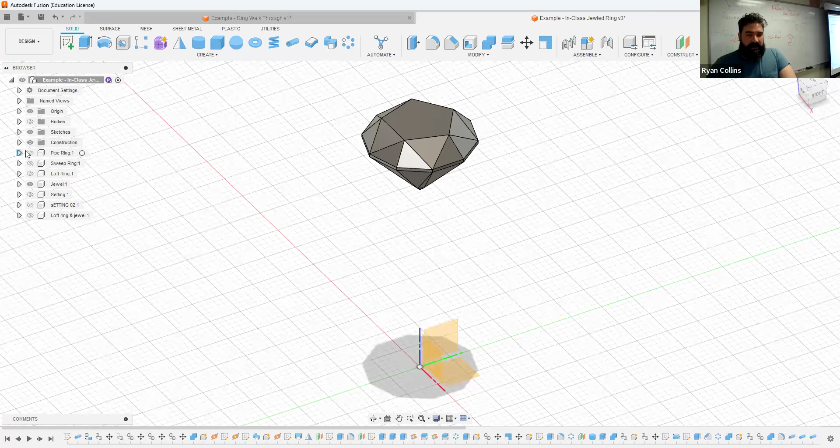All right, so I have just a basic jewel here, and we're going to be building that into some sort of a ring. So what I've done, like for the pipe ring, like I said, you can make just a simple pipe. But this one is one simple pipe and copies rotated ever so slightly or moved out and then joined together to make a more complex kind of laced ring. It's just using the simple pipe tool, making multiples.

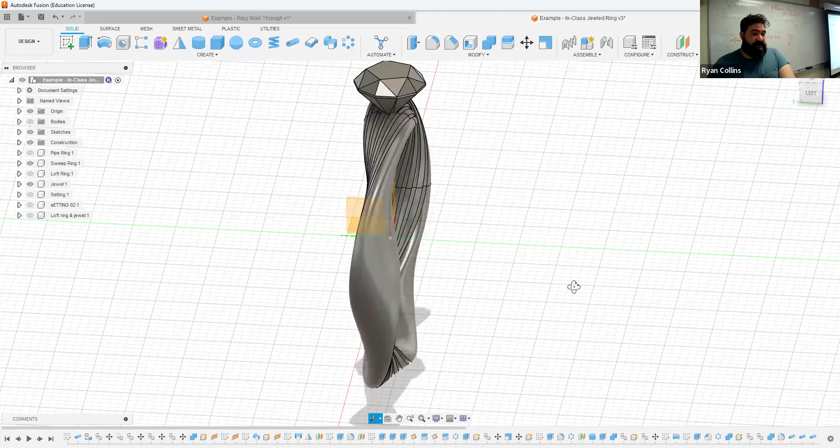You could do a sweep, which we didn't go over before, where you can actually rotate that profile along that path. So this is the result of the same thing of making an oval, and I made a notch in one, only in this one I made multiple notches, and then rotated it around that simple path. So a really cool option; that would probably be a pretty painful ring, but a really neat bracelet.

Or the other option of a loft, two profiles, in this case a small oval translating up to a rectangle, and then a setting built up straight above and that sort. And ultimately that's what I ended up working with when I made the complete one, along with additional features on the sides. So those are just a couple ways you can go about this.

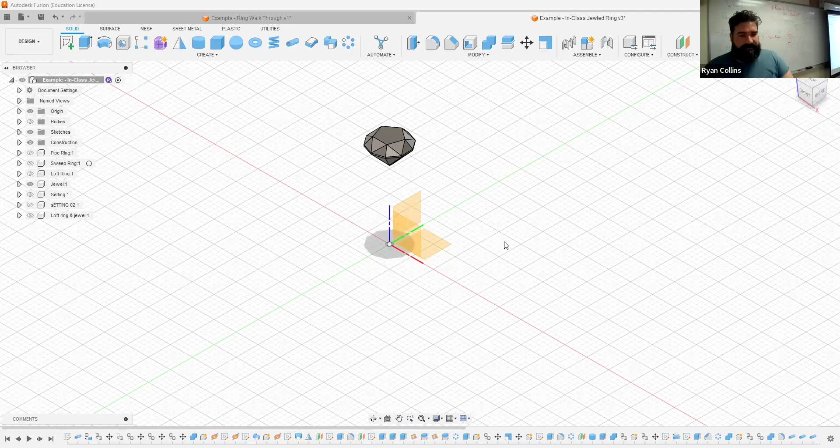But I want to focus on making a jewel. So let's open up a new project, and first thing, save: example, jeweled new ring, neato. Okay, so obviously we can set up the different components and all that later, but first let's figure out how do I make something that looks that complex. It's really not, but let's show you.

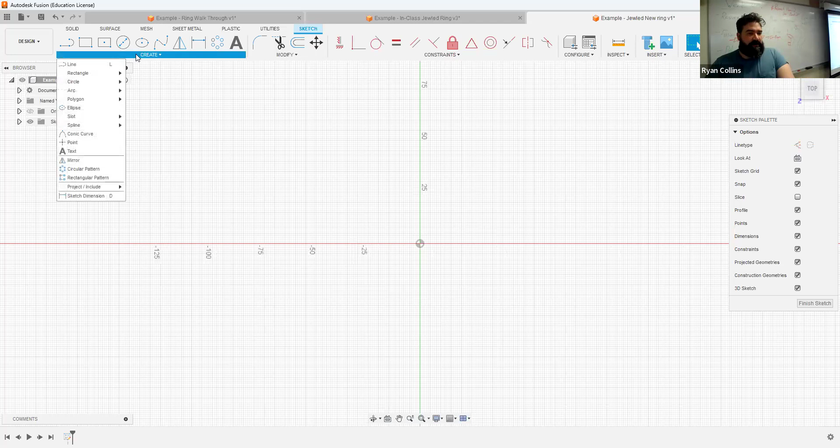So I'm going to start with a sketch, in this case XY plane, just so I can look straight down. And instead of a circle or anything like that, we're going to use the Polygon tool. So you have three options here: circumscribed, inscribed polygon, and edge polygon. We're going to focus on circumscribed and inscribed.

Basically, all that means is the polygon is based on a circle, and whether or not you want the tangent lines to be on the outside of the circle or the polygon lines to be squished inside. For this case, it really doesn't matter. You could always resize later. So let's just say inscribed this time. I'm going to leave this as a center point.

Now, do not hit enter first. You have a couple of options here. As my mouse goes around, I can rotate it. Might as well leave it right on that path there. You can, of course, say what diameter you want the circle. Again, that's diameter, or sorry, that's radius. I apologize. There you go.

A little hard to keep it on center here, but to change how many sides, press tab, and now you have the option here. The important thing is how many sides to choose in this case. Let me just hit escape here so I can show you.

What we're going to work with here is, don't let this fool you. You have 1, 2, 3, 4, 5, 6, 7, 8, 9, 10. So 10 sides here.

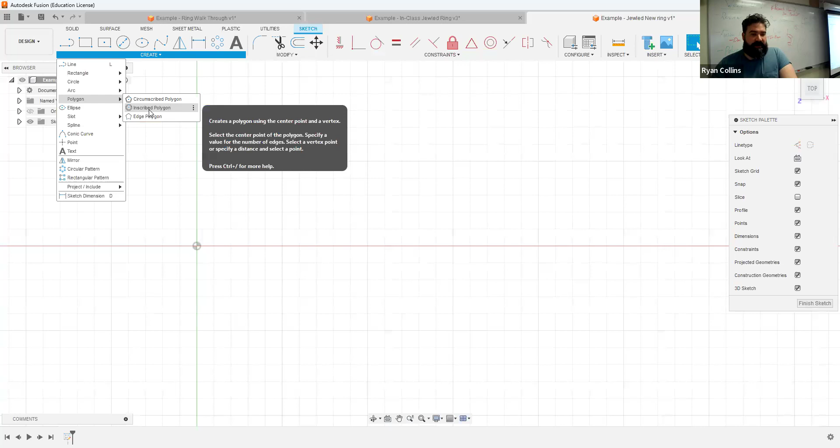So let's repeat that. Polygon, inscribed, center. Sure, we'll make it 10 sides, tab over. Let's make it an 8mm ring, just keeping things different. Okay, so that makes my polygon. It's all I need. We're done with the sketch. That's it. This is done largely with a multitude of extrusions.

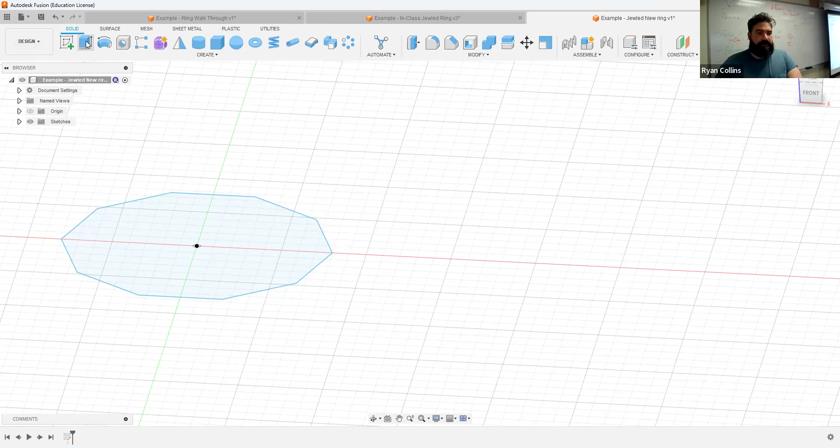So hit extrude, and in this case, I'm just going to go up like 1mm. It's fine. Or you could even do half, just a little bit less. The reason I'm doing that I'll explain in a minute, but ultimately it's for the sake of how we're splitting and making more facets. You need to have a little bit of space there. Otherwise, you could go straight into stuff. But in this case, we need that.

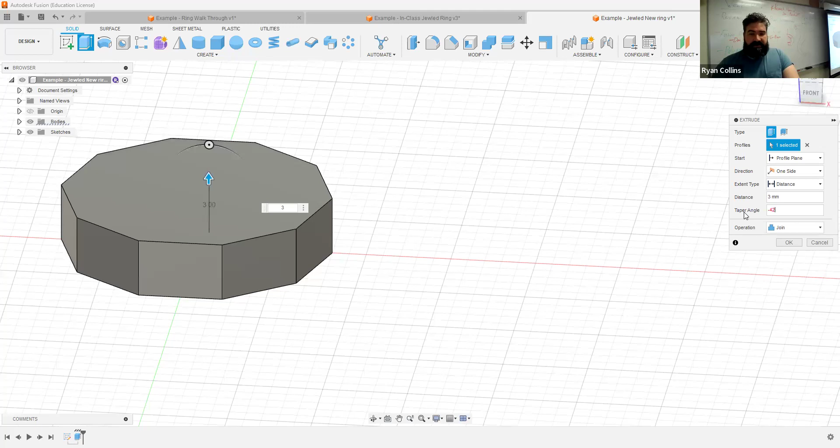All right. So now we're going to perform 2 more extrusions. One going up, one going down. In this case, I can just select the top surface, and let's go up like 3. But what we're going to do is put a taper on this. As I said before, one of the most common cutting angles for jewels is 42. So negative goes inward. So press negative, 42. Instant facets.

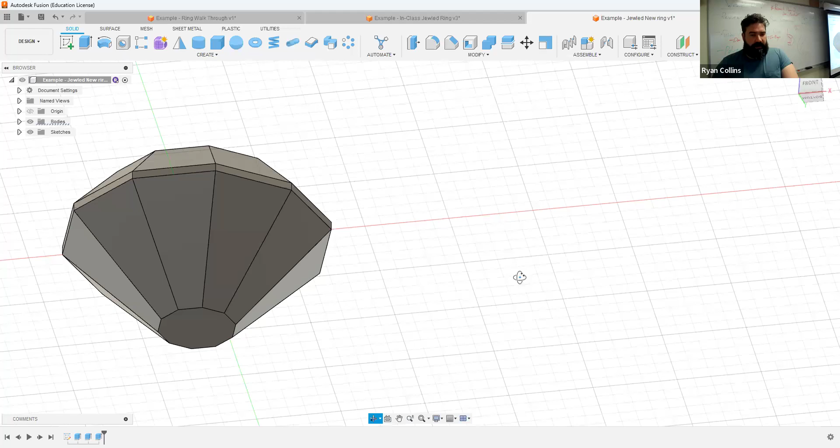Okay. Orbit under, repeat extrude, same. We'll go down slightly more, let's say 6. Taper angle, negative 42. Doesn't have to be 42. This is, like I said, just a common thing. Okay, there we are. Simple jewel. But I want to make this more complex. Note the number of facets there makes it all extra shiny. In order to do this, we need a bit more. And also, no, I did not bring it down to a taper. You cannot bring it to a final taper for this to work.

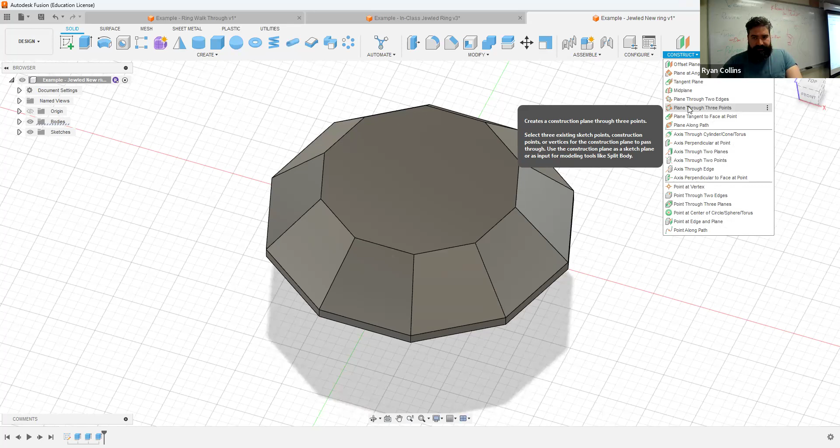So what we're going to do is just pick a couple sides to make additional facets, and then we're going to rotate those facets around using the circle pattern tool. So first thing, we're going to use the construction plane tool, and we're going to add a plane through 3 points. What you'll do is select some opposing points. So 1, 2, and 3 in the middle, and see how it makes this triangle shape. That's what we want. I can go ahead and do the bottom too, but first we're going to go through this.

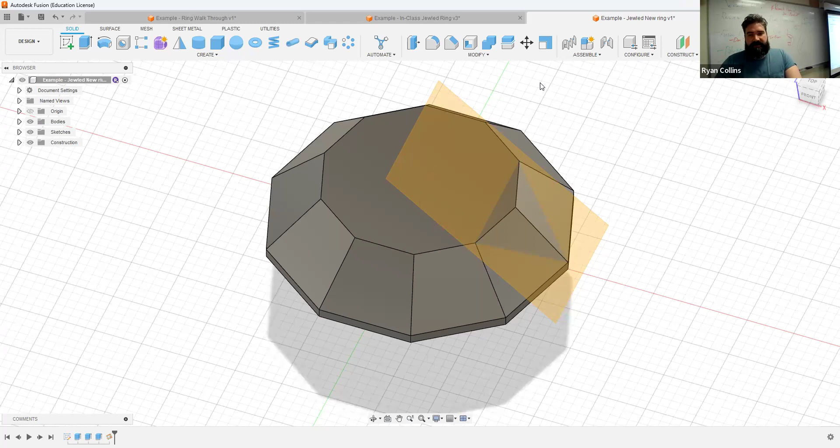Then we're going to use split body, which, as the name sounds, splits a body based on something. In this case, the construction plane. Go to split body, the body we want to split, the main jewel, splitting tool, that construction plane. It's going to make this red circle around, showing you the extent of how far it could cut. Hit OK. When I expand bodies, I have the whole thing and that little chunk it just chopped off. Now I've got that added facet. I can hide that construction plane for the moment.

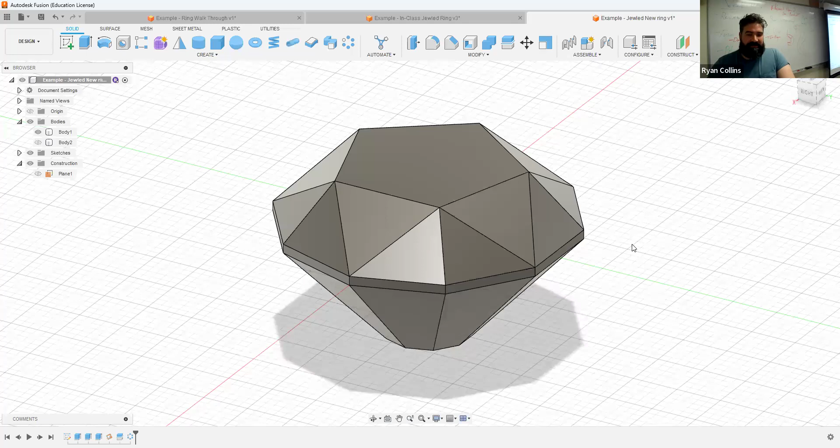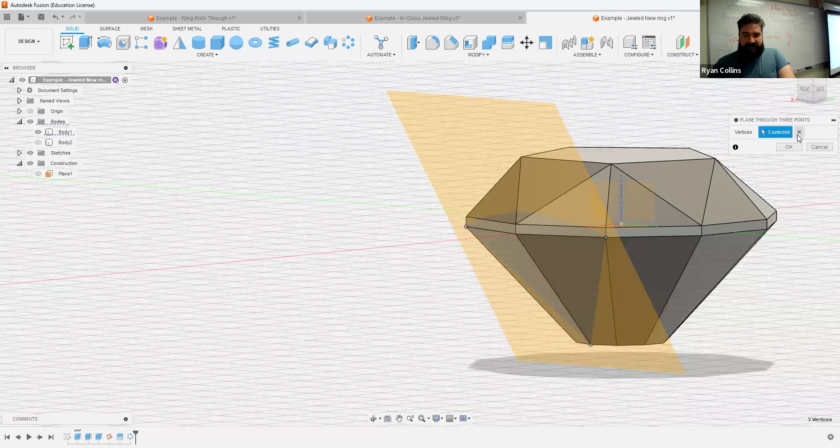Repeat the process for the bottom. Construction plane through 3 points. In this case, we'll go 1, 2, in between, 3. Now see, what's going to happen here is it's going to chop way too much in. So let's reverse that. Make the peak toward the center, the middle here of the extrusion. So select that point. The order doesn't matter. So select my 2 sides toward the bottom. I just want to chop out those sections. There we go. Finish construction plane.

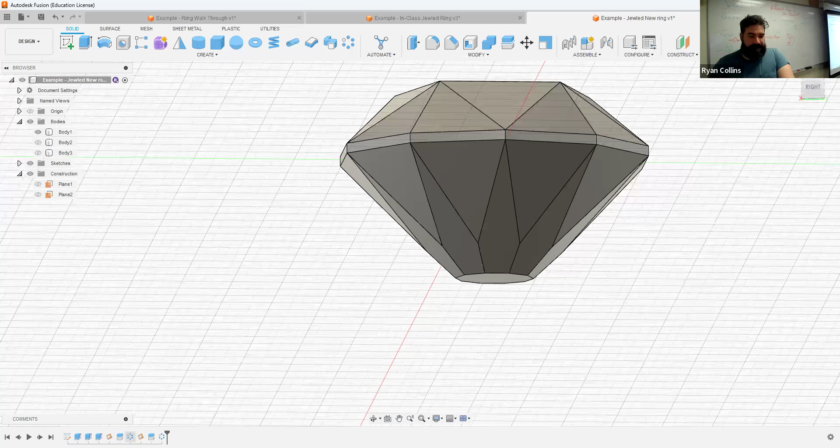Split body, the main body, select cutting tool, construction plane, hit OK. Hide the little chunk, hide the construction plane, circle pattern, object type faces, select axis, the Z axis, or my origin. It's going to select 5 again. That's good. This time, let's try 10. That's probably going to cause problems. Let's hit OK and see what happens. Ooh, makes it a lot neater. That's actually pretty cool. Maybe I should have done the repeat in 10 before. Let me step back and do that. Edit feature, instead of 5, let's make that also 10.

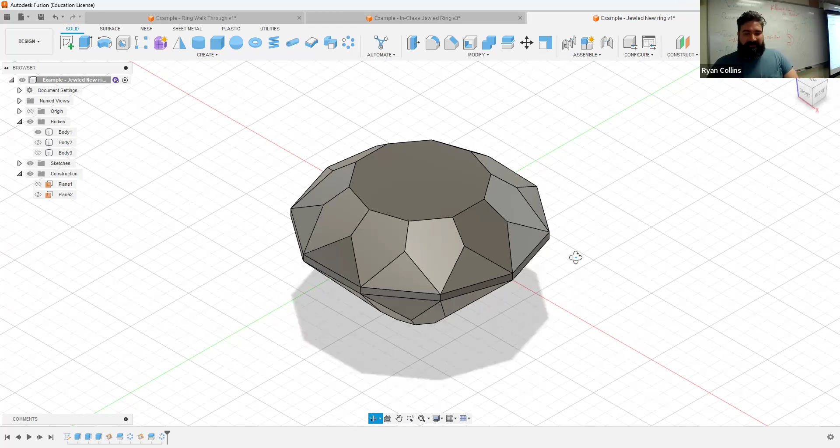Nice, nice. So there you go. Really simple way of making a multifaceted jewel. Is it absolutely accurate? Nah. Does it look neat? Yeah. If you do want it to go to a point, now you could extrude it downward to a point. The problem is we needed that flat bottom to have enough vertices to select from.

So now if you want, final thing for the jewel, go to extrude and make sure taper angle -42, so it just continues, and you can just draw it down until it makes a point. Leave it at join. Yep. And there we are. So really simple way to make a jeweled object. You do not need to make it come down to a point for this project. That is just if you so chose to make that come down to a point. It's just important that you do that after the fact.

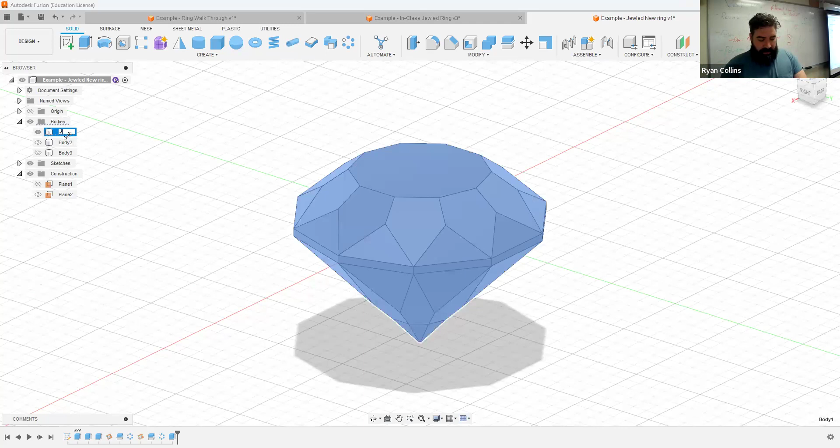Okay. So that's how to make our jewel. Super duper. I need a ring around that. Somewhere around there. This is the part that is going to be kind of up to you, however you want to go about this. So I'm going to leave this body here and title that as jewel, because I'm going to use that as multiple other options. All right. So let's make our whatever. In this case, let's make a bracelet. Same diff, it's just larger.

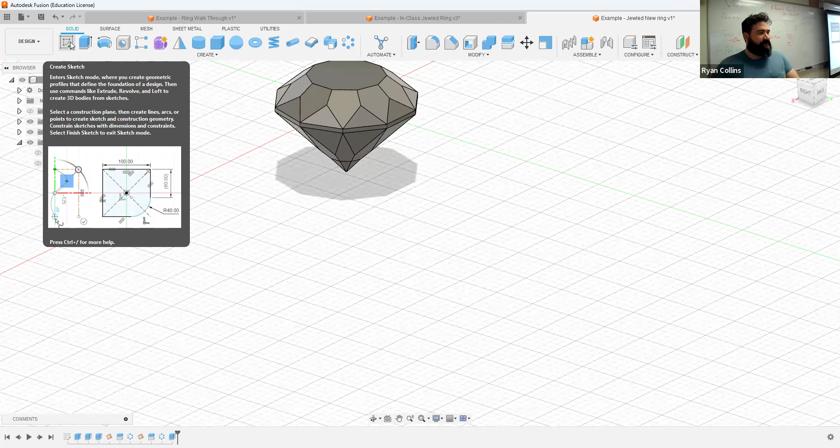All right. So right now I'm going to leave this sketch on its own outside, kind of like we just did with the lidded container project, because I want to be able to use this sketch on any object. So same deal. Make a circle. I want to make a 2-point circle. I'm going to just start my point somewhere close to, doesn't have to be touching by any means. It could be floating well above. We can move that jewel object up and down as we please. Probably do just that. All right.

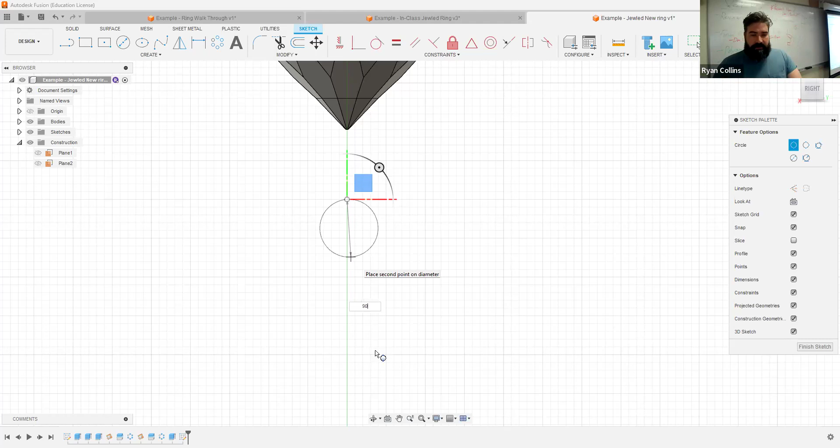So if I want to make this a bracelet, like I kind of said before, that'll be a significant bracelet to fit around my hand. So yeah, let's make it kind of loose. Let's make it 90, right? 90 millimeters. Wow, they got big. And let's snap in place. It's always a little tricky getting it to snap. There we go.

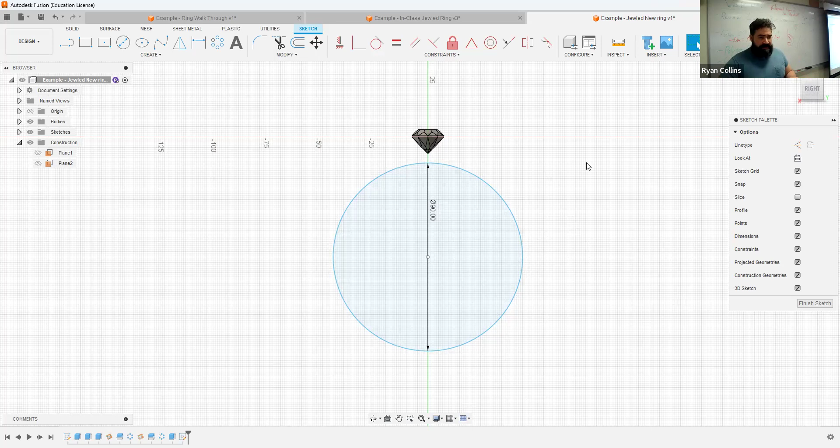Okay. So if you are going to use the pipe tool, a single circle is fine. If you're going to use the sweep or loft tool, I recommend making 2 separate sketches. One sketch is my circle profile, and I'm going to label it as such. No, I didn't want to do that. I meant to just slow click circle, and then make an additional sketch for your 1 or 2 profiles, depending on if it's sweep or loft. The reason for that is your sweep or loft profiles are perpendicular to the circle. So start a new sketch on the perpendicular plane, the XZ plane in this case.

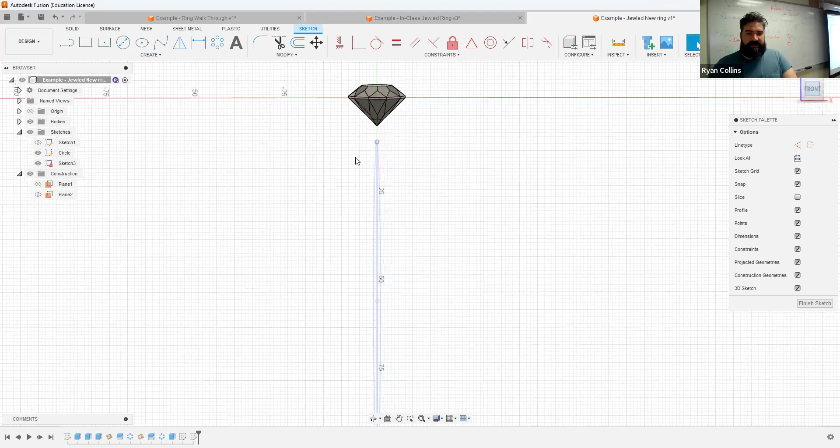There we are. If you need a more easily interactable way to work with the previous sketch, use project, sketch, hit OK. Now, the reason I did that, you can see how much more clearly the absolute top and absolute bottom of that circle are from a perpendicular profile. Again, things that make your work easier. There we are. All right.

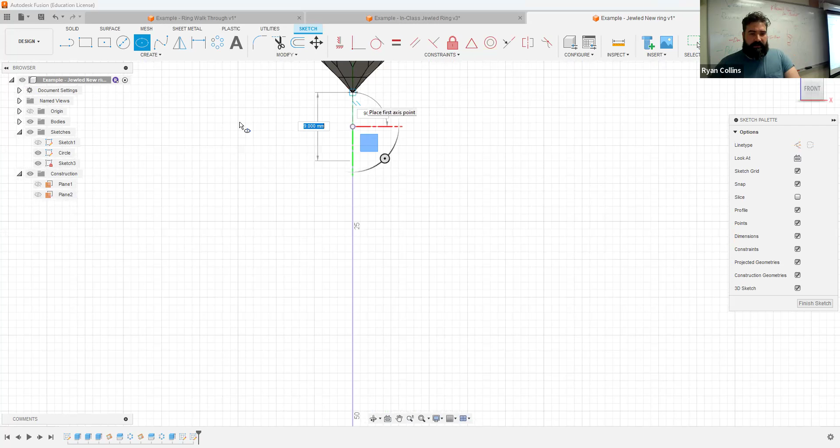So I can make, let's say, an oval. I can actually make it snap directly to. Let's make this a little bit larger, and why not? Now, the problem is that it does make a center point circle for this, so maybe this wasn't the best option, but whatever. We'll work with it from there. Hit OK. I'm going to hide the jewel real quick. That way that's out of the way and not interacting.

If I am making a sweep, 1 profile is fine. If I'm making a loft, you need 2 profiles. In this case, I'll do both just to have them built on already. You can do really whatever you need. So 10, sure, and we'll make that, I don't know, 50. Okay. You can, of course, adjust your profiles. If I want to make these rounded instead of rectangular, go ahead and add a fillet.

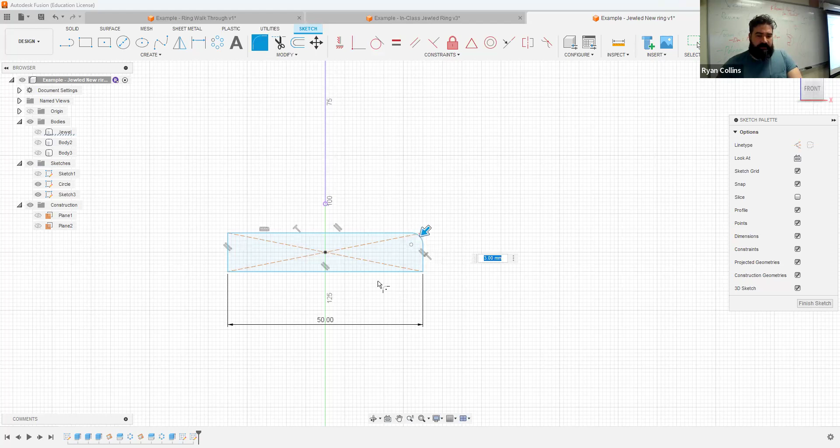If I'm going to make all these the same, adjust one to the size you want to fillet. Do not hit enter or anything, and continue selecting around the edges. And it will link all of them to the same, and now I can adjust all of them the same way. Oops, it did not click all of them, did it? Something happened. I think I hit the wrong thing. All right, fine. I think I hit the wrong button there for a second. Repeat fillet.

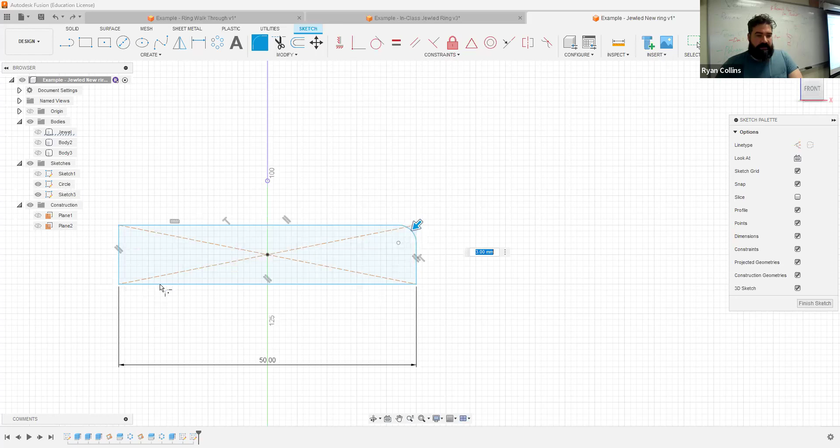Sorry about that. There we go. All right, 3, 5, whatever. 6 too much, so I guess 3 was good. For some reason it keeps knocking out of that one. Weird. And of course it doesn't come up with the same one. Whatever, there we go, okay great.

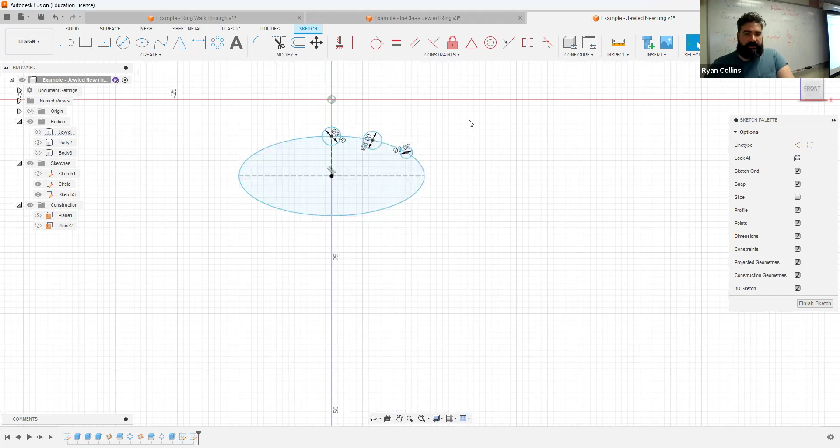And there we are. For this case, let's go ahead and throw a couple of notches into the sketch just for reference. Center point circle, we'll say 3, and then I'll make a couple more over here, 2, sure, 3, super duper. If you want to make these all match, obviously you make a mirror.

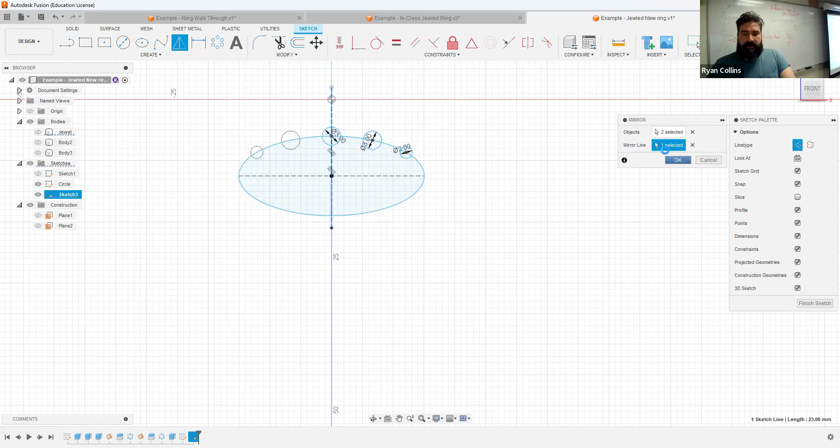So let's make a line straight through as a reference line. Make sure that line is a construction line. Press X, so it's a dotted line. Mirror those circles across my mirror line, and it repeats over there. Just so we have that. All right, finish sketch.

Again, if I want to make a sweep, I can select my profile, select my path. There we are, I've made a tire. Congratulations. But how you can work with this, you can play with a parallel and such.

That's not really going to work very well for this case. Keep your profile perpendicular in this case. You can twist and taper this, and it works in degrees. So if I type 180, it doesn't make a complete circle. It needs to come back to the same, so it needs to be in increments of 360. So the next close one would be 720.

So if you want to make it super duper twisty, there you go. I've already forgotten what the next one would be... 1080? Yeah. See if it's too much. Nope. So you can keep going until it just completely errors out, or whatever. So there you go, you can make that a sweep and make a super tire twisty time.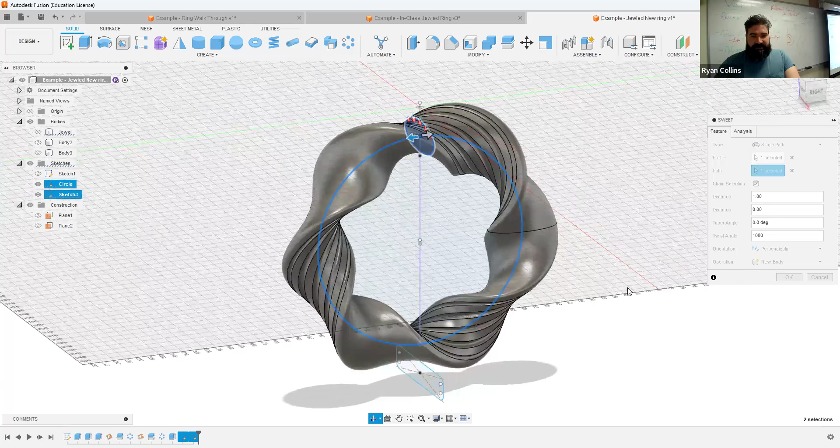All right, what object is that? Sweep twist, neat, so that's how you can make that. Now, how are you going to put a jewel on that? I don't know, you figure it out. But that's how you do that.

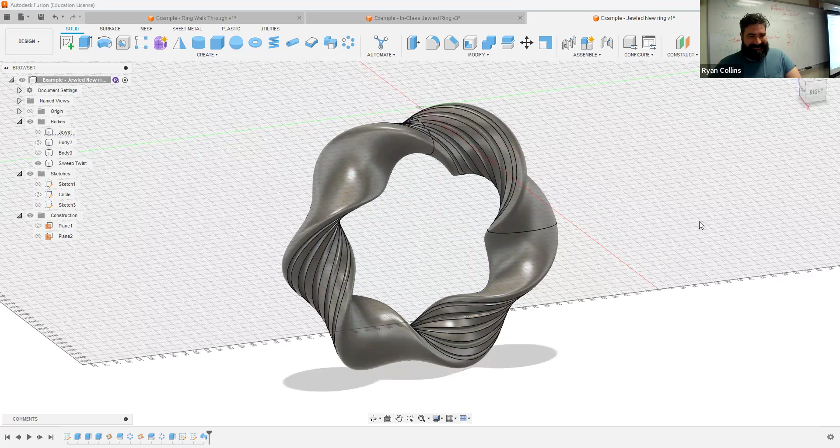So let's save right there because I haven't saved in a little bit. Sweep, all right. Unhide the sketches, and let's do that again, this time with the Loft tool. Come down, remember that Loft transitions between the two. So select one profile, select the second profile.

It's going to error because I didn't select the path yet. I need my rail, which will be that, center line. Yes, rail, there we go. Now it's only going to make half because it's going from one and stopping at the other. Like I said, you just mirror them. There you go, this is functioning properly now.

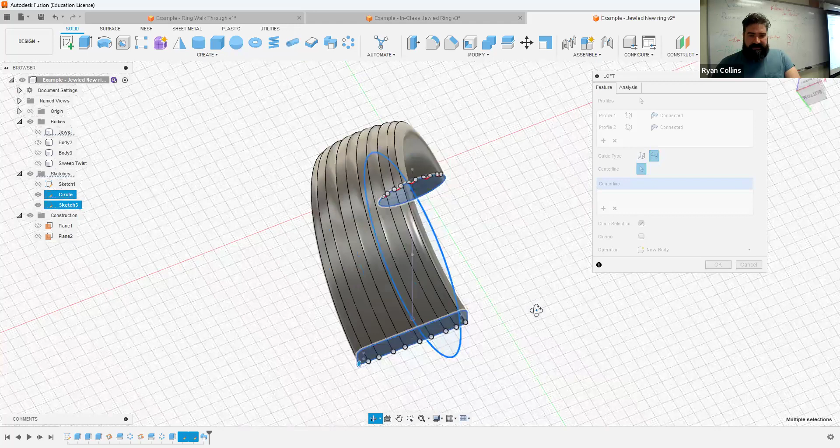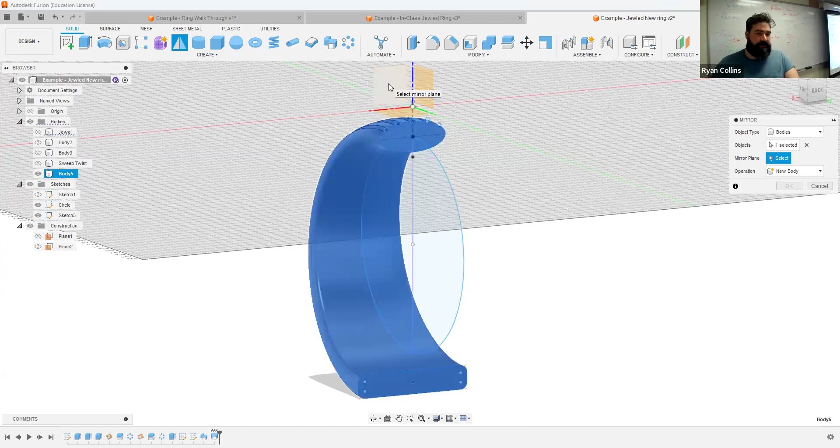Again, I'm not sure why the other one didn't, I must have done something wrong. But anyway, there you are, that's how you can make those work out. If when you make the other side, the object, mirror the object, which is one side, my mirror plane can simply be the origin plane, and you can let them join. There we go, now I've made a stranger tire.

So that's how you can make a loft and a sweep ring. But as I said before, if you're making a pipe ring, it needs to be more complex than a single. So let me just title that as loft. And let's go back and make just the one. If I'm making a pipe ring to bracelet or ring, you could do that, but it cannot just be simply one pipe.

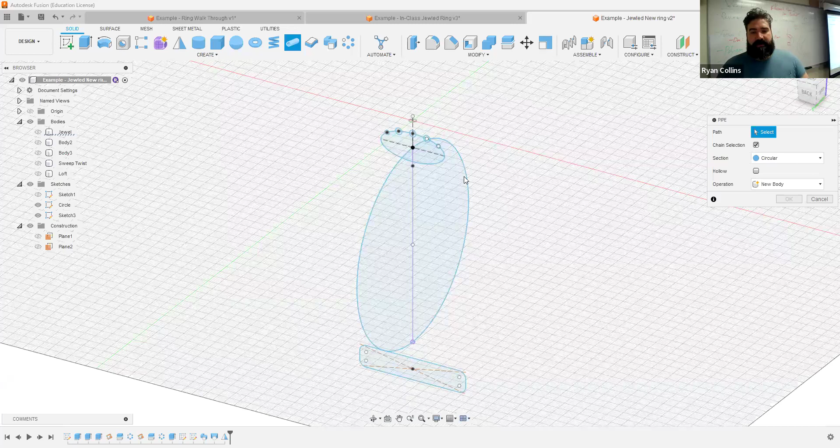So select it there, and let's just say, sure, we'll make that a 5mm pipe. Super duper, hit OK, my loft here. Now I'm going to go ahead and start my new components here to start separating these things out because this is going to get more complex. Pipe ring, I'm going to label that as pipe 1, and then I'm going to click and drag and drop that into the pipe component.

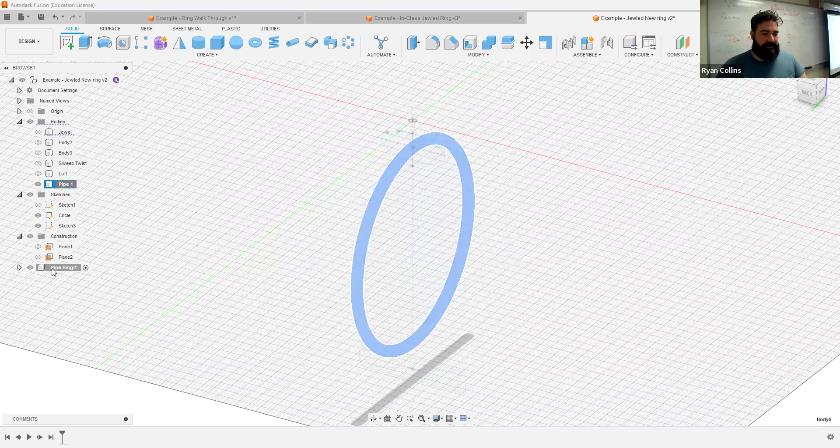I'm going to switch now to auto color, so Shift+N, just so we can clear some stuff up. I'm going to go ahead and hide these other sketches, I don't need them right now. We're just working with that pipe, we're just that one ring.

Okay, so what I'm going to do is I'm just going to rotate this a little bit. Select there, the pipe ring component is active. Let me collapse some stuff so we can kind of make sense of this stuff. And let's copy and paste.

Oops, there we go. Copy and paste. Just Control C. Come on, buddy, why aren't you doing this? Making me look like a schmuck, doesn't take a lot. What is going on here? Pipe ring, sometimes save, let's just see what's going on here. I probably have a whole stack of copies and pastes. Nope, that's weird.

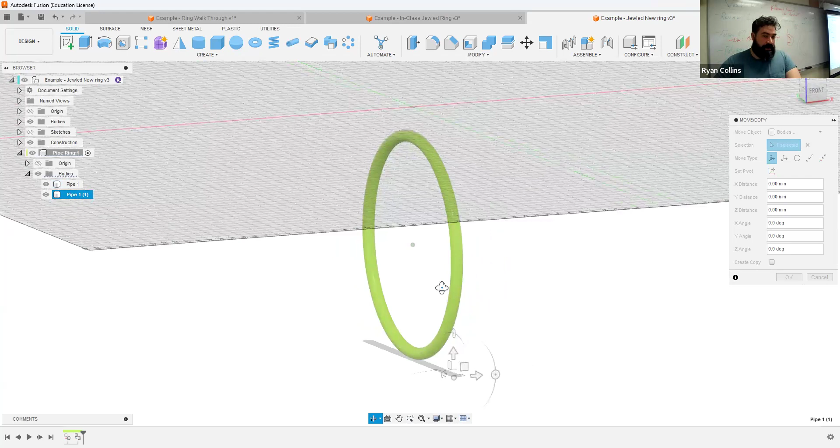Why are you- there we go, I have no idea why I wasn't doing that. Sometimes because of how the copy and paste function works, it will not put my move point in the center, but you can see it when I orbit around. If you need that, go to Set Pivot, and when you move your mouse toward the center of this ring, it should snap in place. Deselect Set Pivot - I know it's very frustrating that it does that. Now I can rotate this a little bit.

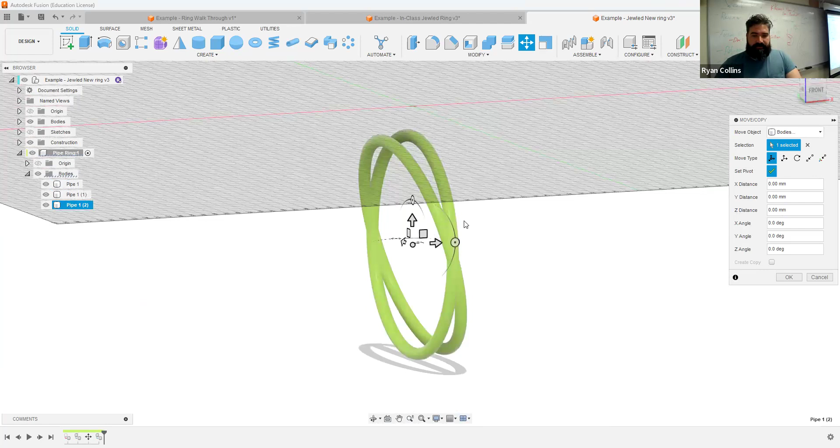I'm just going to go to the side here. Orbit, all right, 15 degrees, just so I know how far. Hit OK. Select the original, copy, paste. Hey, now it's working, do it again. This part gets a little tedious sometimes. There we go, Set Pivot. Go the other way, -15. You can see where I'm going with this. Do this a couple more times, make it slightly more complex. Copy, paste.

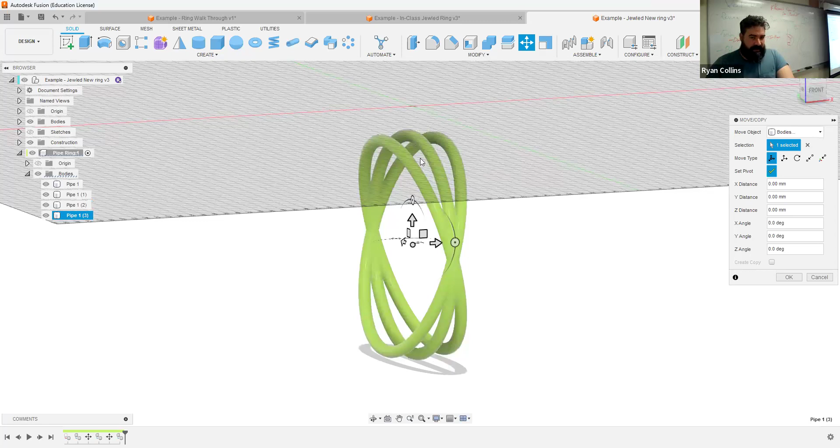If this starts getting too complex for you, meaning you can't select what you're trying to select, hide a couple things. In this case, I'm going to orbit it the other way. If you don't deselect Set Pivot, it won't work - again, really kind of frustrating. Hit OK. It's important that you go back to the original simply so you don't get lost doing this. Now orbit that one the other direction. Hit OK.

That's all - really simple way of just making this thing more complex. I've just copy and pasted and rotated a few times, rotated a little bit, and there you go. So that's the requirement. If you choose to make this using a pipe tool, just make some alterations so it's a little more complex, so it's not just straightforward.

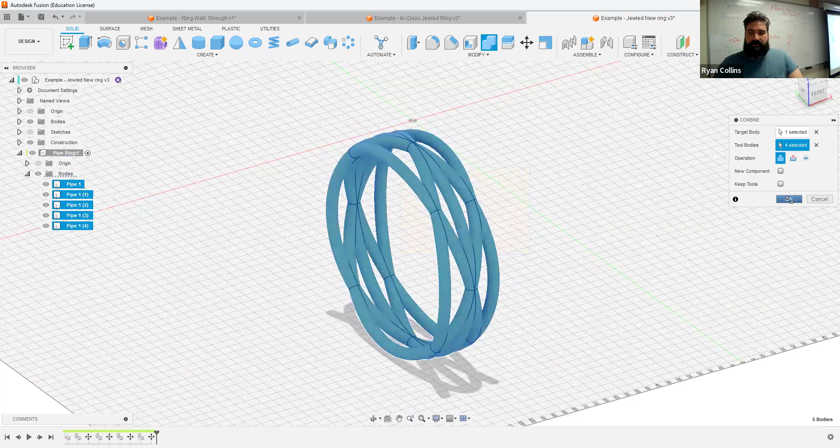Last thing with those would be to join them all together - select one, and then select all the others. Hit OK, there we go. So I just dropped it all back into one single thing. That's all. I'll label that as complex pipe.

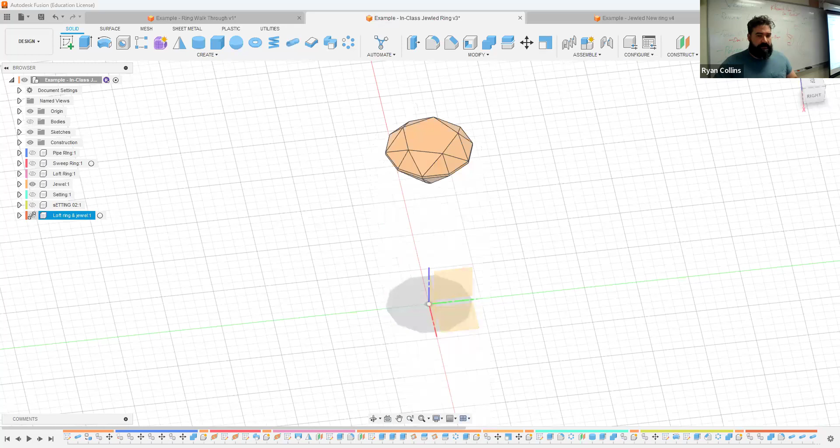So the last bit on this would be making some sort of a setting. Again, by no means am I asking you to make an actual jewelry setting - if you want to do research and actually look into that, great. But looking back through a couple of the other ones, let me switch back to actual assign color. You can see, yeah, that looks complex at first, looks very complex, but this is all done off of a revolve tool. So we'll keep working with the pipe ring, and I'll switch back to auto color so we can see what's going on.

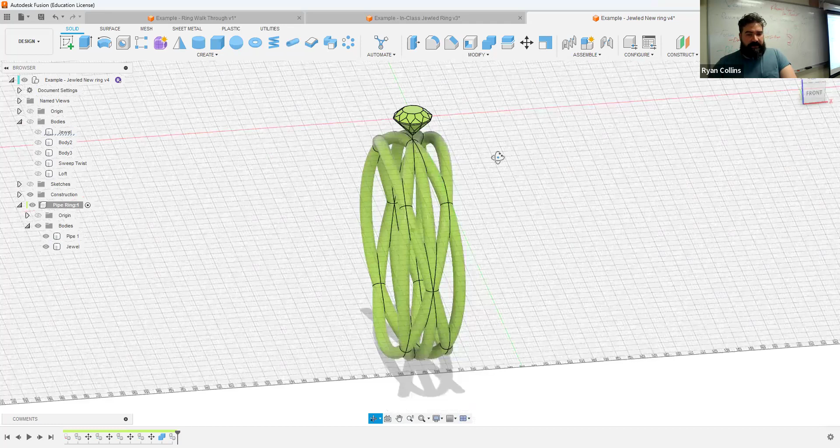All right, so jewel - let's copy and paste that jewel so I have two of them. And where'd my- great, because I already had the pipe ring component active, it pasted the other jewel into the component. So I can hide the original, hide all those, that way I have more than one. So currently it's floating a little bit above - that's not really a problem, I can always move stuff around.

So, super detailed jewel for kind of a funky ring or bracelet, apparently - I forgot about that. All right, so what I'm going to do is just run through a quick thing here.

Again, I'm not expecting a professional jeweler setting. This is at best a kind of making-the-point kind of thing.

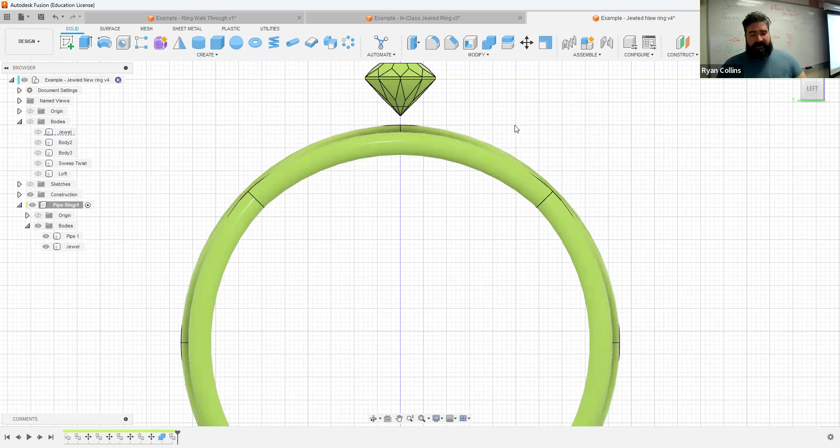Start as usual with a sketch, selecting the XZ profile, and I'm going to base this around my ring or my jewel. First thing I would do is use project, which you can go to create down here or just press P.

I want to select not by face or anything, I want the whole body of the jewel. Select there, hit OK, and I'm just going to hide that, so you get the outermost outline of the jewel. That's all that's for, it just helps me work.

So you have a couple options. You could use the offset tool of exactly that ring, that jewel, and expand it out, and that's basically my profile. Let's make it a little bit thicker, -3. Okay, that's kind of excessive. Maybe make it -2. Again, jewelry's supposed to be delicate, I guess.

Or of course you could make something if you wanted it much more of your own design, maybe something like a fit point spline, drawing around. I'm not going all the way up, I need something that's just going to go just past where that jewel would kick back inward. So something like right there.

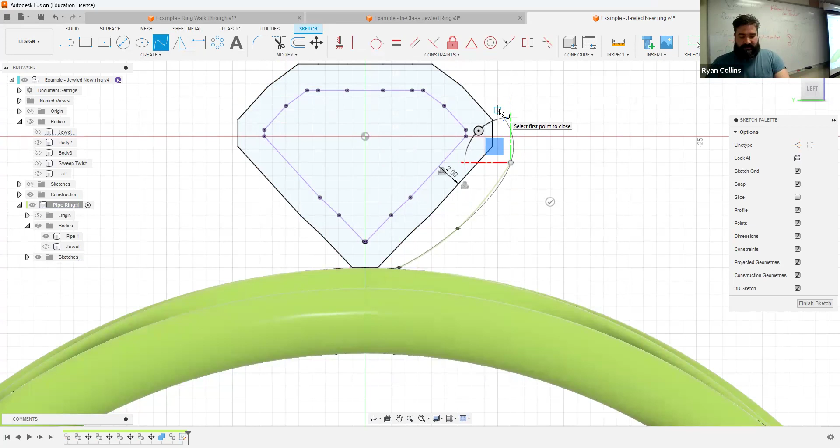So with that I could offset that and go inward. That works. Offset not really working very well, so let's hit escape, and I'm just going to draw straight over.

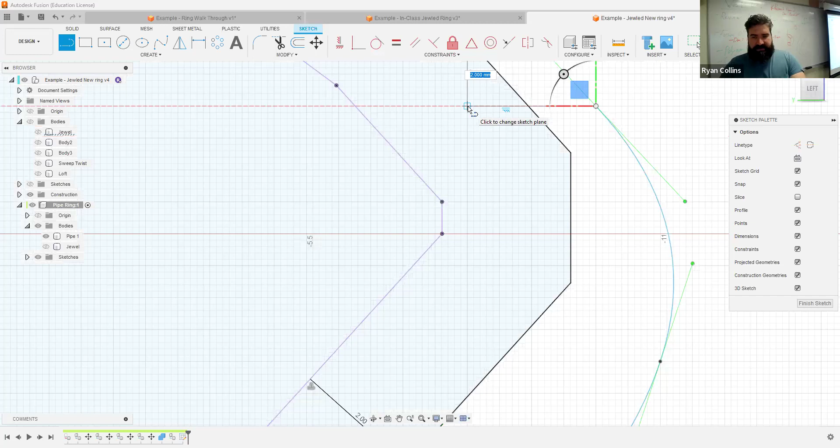Now, the reason I can just draw straight over and draw inward... oh, I forgot where my line was. Let me just delete this whole thing. I accidentally based that line off of the offset of the jewel. So let's make two different ones.

First, let's use the offset, something just slightly outside of there. So I'm going to use a line tool and I'm just going to draw - oh, there we go, that's a midpoint of that line. Midpoint to midpoint, neat, the little triangle symbol comes up. Those are constraint tools, leave that.

Nice. And since I know this is going to be a revolve, remember I only need half of a profile, so right down the center. Heck, I can even use the actual center point and go straight down. Something is messing up my design.

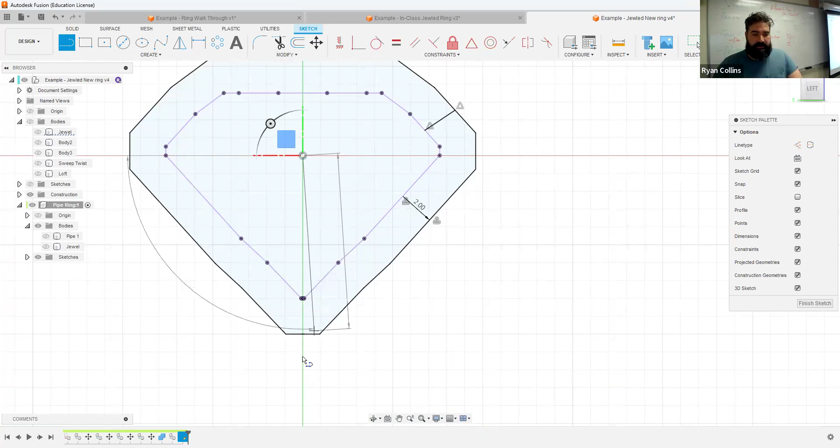So let's go ahead and hide the pipe entirely. Something's kind of going screwy there. There we are, just goes outside. So now I know that this section can be isolated, that's why I'm doing this.

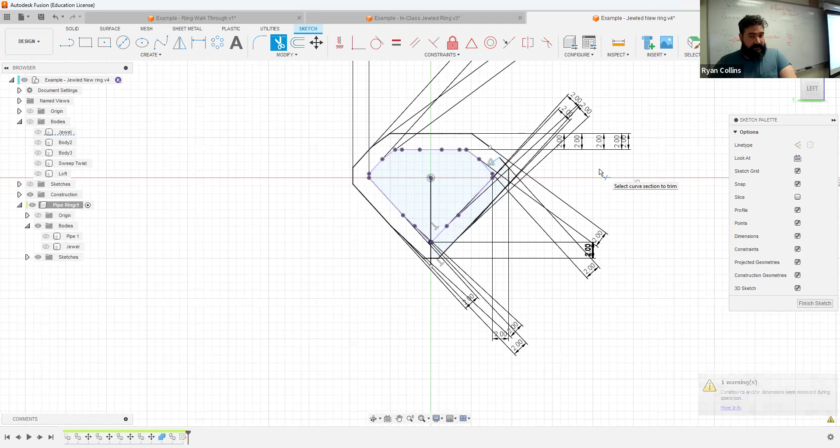Nice, so I could of course do some trimming and all that kind of thing. The reason why I do not need an entire - oh my God, what just happened there? Apparently an over-constrained thing, so I don't think it likes being trimmed. All right, we'll just leave it there, and I'll make some adjustments afterwards.

All right, I finished the sketch. There we are, go to revolve that profile around the center axis. Now you could make a whole circle, or you could do like a partial one. Let's say just make it, I don't know, 10 degrees. Let's make it go symmetric overall, 10 degrees either side, so you just make one tine.

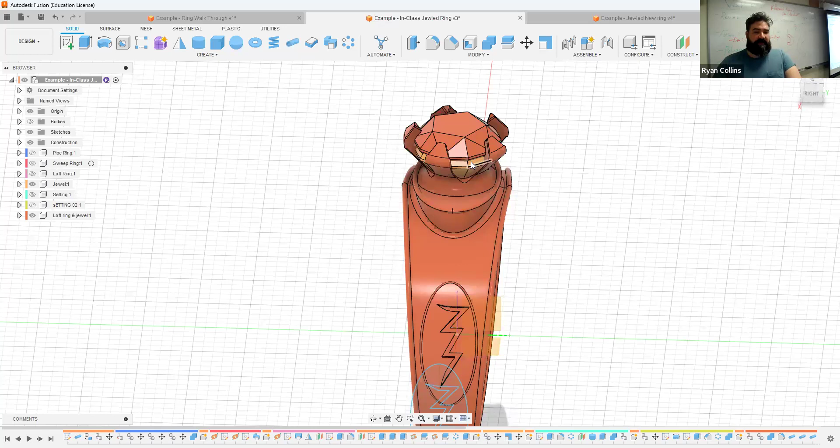These, I made a whole 360 and used an extrude cut out to make the individual tines. So this way, I'm just going to make one single tine and revolve and make multiples of that. It's up to you, doesn't matter.

With this way, you want to make this a little bit more featured. Maybe use chamfers, and let's clean some of this up. Cutting downward a little bit, something, something - again, I'm just adding features to this.

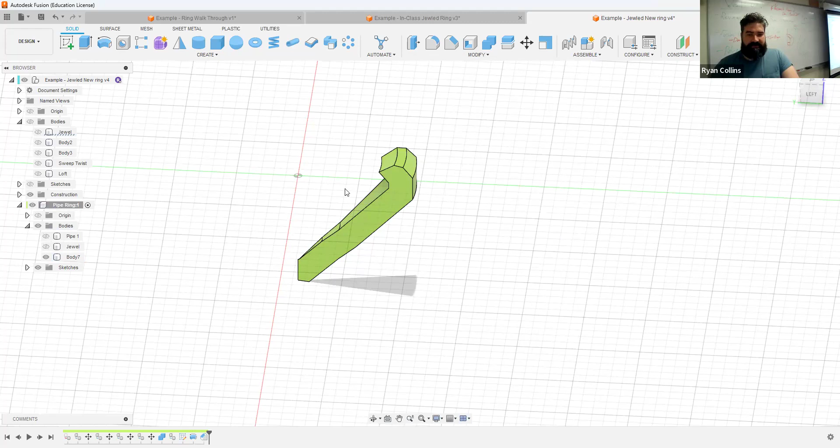Maybe add a chamfer to the faces themselves. This might overcomplicate it, let's try 0.5. Remember that chamfers sometimes get messed up because of tight profiles, so instead of faces, it looks like it's going to force me to select some individual edges.

And we won't select everything, let's just try and select a few of these and work our way around. Just those, let's say 0.5.

Should have done it to both sides at once, but if you forget, you can always add the plus sign, and that just adds an additional function to the same tool, so I don't have to make two chamfer tools down on the timeline. 0.5 on that side, neato burrito.

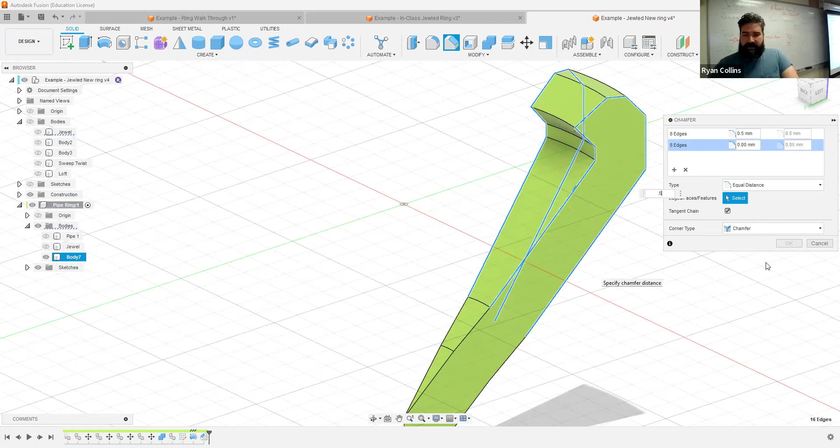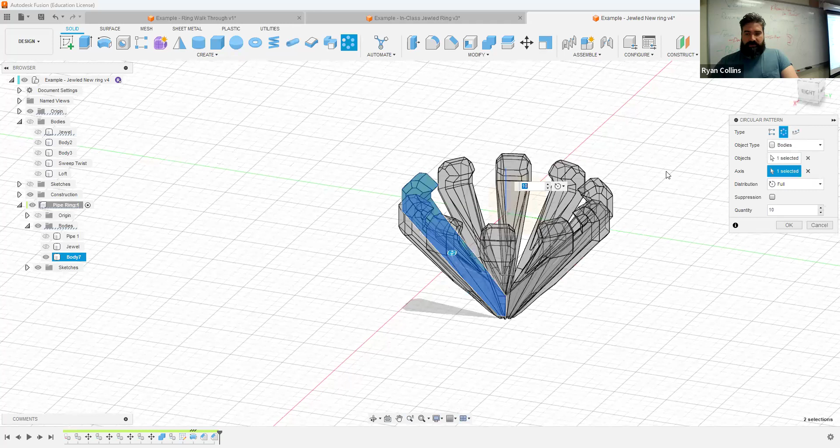Okay, to make the individual tines, make sure my origin is visible again. Use the circular pattern, not faces. I want the whole body. Select that body, axis, around the axis. Ooh, 10 is much too much. Maybe let's try like 3. Maybe more than that. Since the sides are multiples of 10, let's do half of that,

make 5. That seems reasonable. The reason I say this is I kind of like it to match up a little bit. Hey, what do you know? It does. There you go. Select OK. And very easy to make multiple tines for your setting. Now, granted, if this were a real setting, this base would be way too delicate. So maybe what I should do is also make something down here.

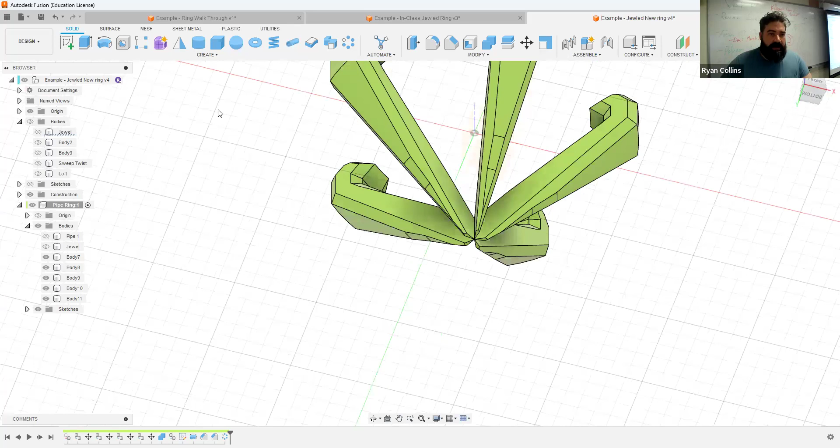Just for time's sake, I'll just make a simple cylinder based around that plane and in the center. What I did is I just select the bottom face there. How big should that be? Shouldn't be too large. 3? Sure. And I'm just going to extrude this upward.

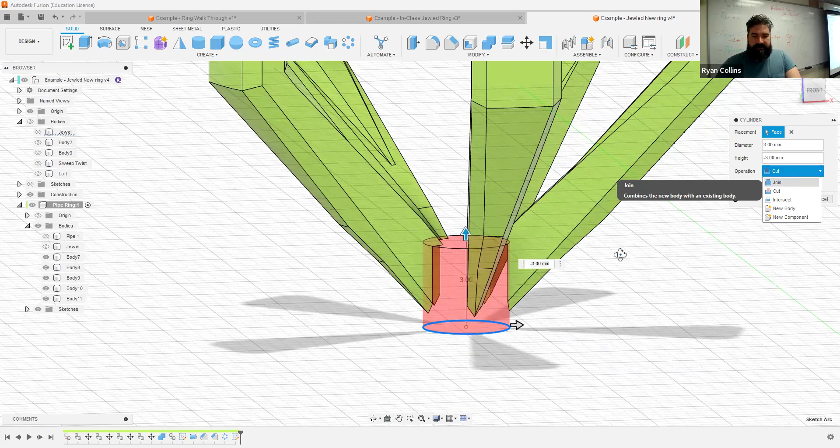And when I do, it's automatically going to cut, but instead I would like it to join. So it's just going to link all of these together. Visually, it's not really impressive, but that would be a really quick way of working with this. Select join, it just compressed all of those together. And let's just relabel that as setting. Let's just save there, setting.

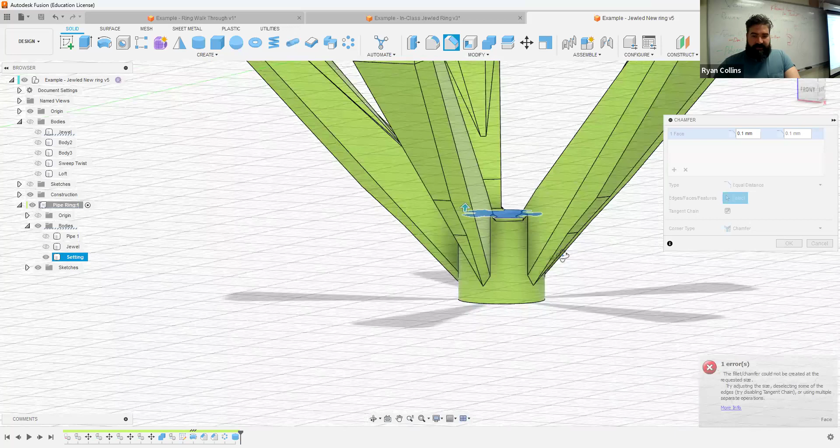Okay. And again, if you want to fancy this up, you could go back in and add some chamfers. Let's try right there. 1. Yep, too much. 0.5. Still too much. 0.1. There we go. Teeny tiny chamfer was apparently enough. If you try to do it on all these sides, you might run into some weird stuff.

Okay. Now, oh, what's up? Yeah, doesn't like trimming projection stuff. Yep, exactly. Projection trims, it goes funky. Sorry, Jade, you probably said that a moment ago, but I didn't see it.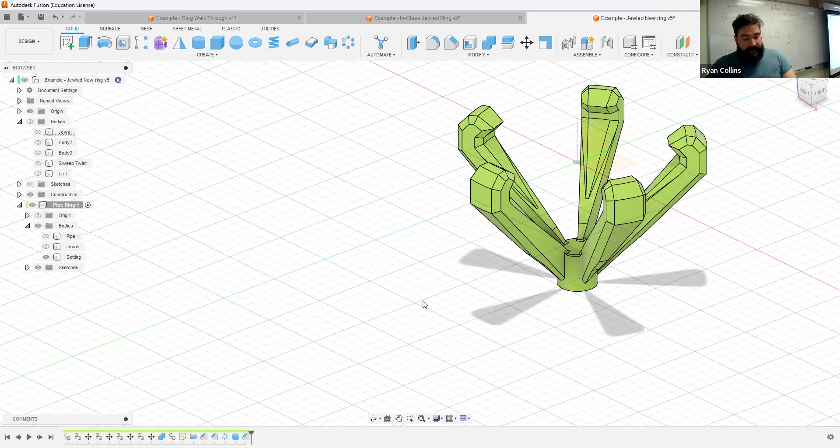All right. So if this were a real jewel and you were actually trying to make this separate, what you could do is use the jewel as a cutting tool. It's probably not going to change anything because it's already made to fit this jewel. But what you could do is use the combine tool. My target body would be the joined setting, but I could use the jewel to cut.

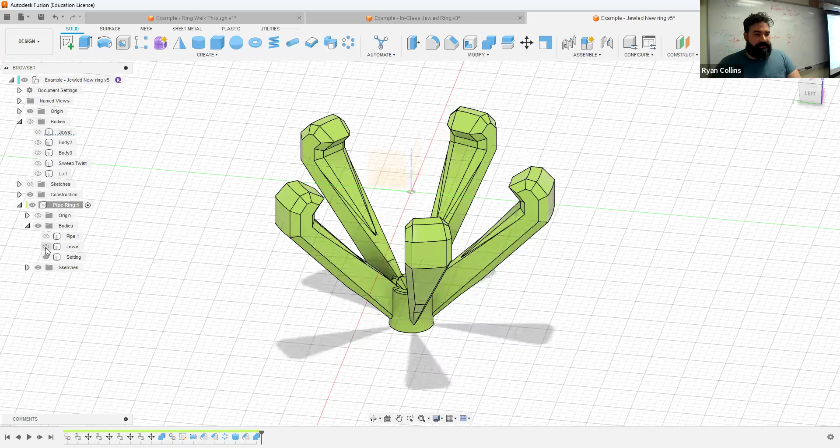Now, I do need to keep the original. I don't want that to be deleted, so I'll select Keep Tools. And when I hit Enter, it's going to use that jewel and trim away any excess inside of my setting. So when I hide the jewel, like I said, it's not really going to change anything in this case. Simple setting, and we're going to end up just joining that on there. But I do want to show you real quick the other option. The trim part will make more sense in a moment. So let's save there.

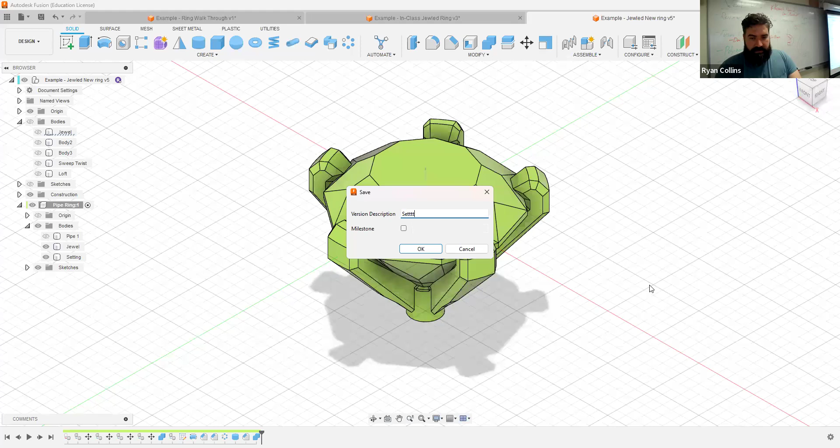What was? They're both kind of simple. Setting 1. Okay. So let's hide that setting. I've got the profile. So let's make a second sketch. And we'll go to front again. If I can't get to the plane, hide the jewel for a second, unhide the jewel. Again, I'm gonna project the whole body. There we are. Hide the jewel.

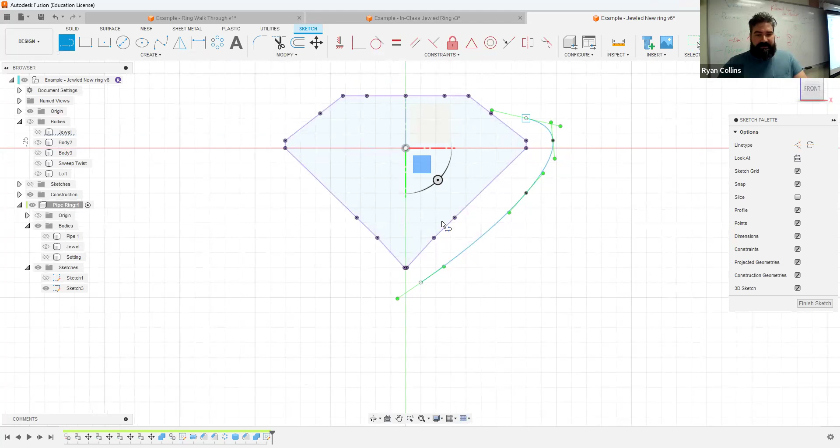This time I'm gonna make a rounded one. So somewhere below, kind of sort of close-ish. Ooh, snazzy. Okay. Play with that as you need. I'm going to make just a straight line here. That works. I'm just going to make a really rough design here. Let's go straight up, something, something. There we are. I need to extend that.

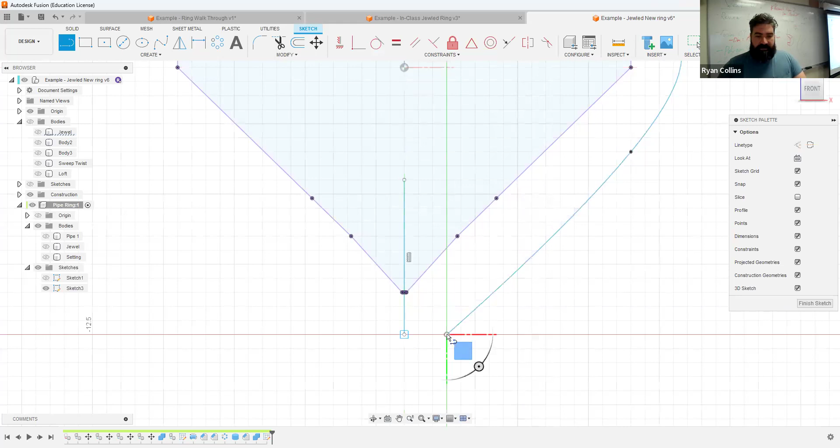So let's just snap that over, or maybe make this a flat bottom. That actually makes more sense to do. So I'm kind of making the setting built into it. Okay. And now for this, I'll just join those two together. Doesn't really matter. Okay, so I get this big kind of floppy thing here. All right, hit finish sketch.

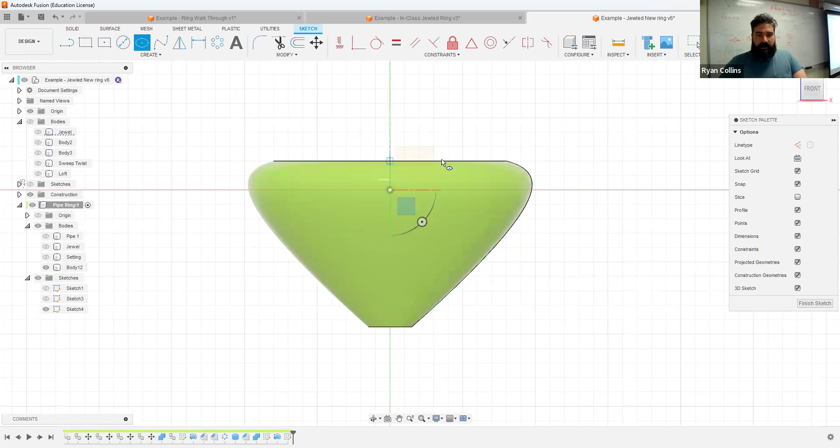Now when I revolve, where's my revolve tool? I'm going to do both those profiles. Who cares? And let's make it a full revolve. So I've just made a weird donut thingy. Great. Okay. This does require one extra sketch, straight out. Nope. Yep. There we go. Let's make a big weird oval into this. That might be too large.

Whatever. We'll make it work. Okay. Hit OK. I'm going to extrude outward with this sketch and chop through the body. Now, obviously, I probably should have made this a little bit larger, a little bit less extreme in the center, but doesn't matter. Quick and dirty. Let's make the features first.

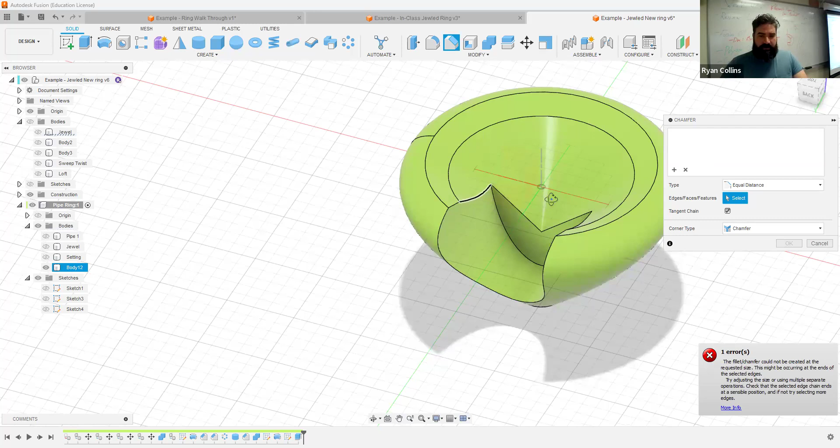Let's go ahead and chamfer that whole face. Put a 1 on it. Oh, okay. That doesn't work as well, so I'll need to just chamfer the edge. Chamfer does sometimes not like to work on curved or sharp points because it's a bevel. It's adding twice as many sharp points to the curve. There we go. That works. Bunch of little corners there. Great. The inside doesn't matter right now.

All right. Now we go to a circle pattern. I do want to select features here, and I want, let's see if just that edge works. Just that edge. Axis around the center. Ooh, 5 is going to be a problem. I made that too large. So let's drop it down to 3. See what happens there. Select OK. Yep, I needed more of it. So let's repeat that.

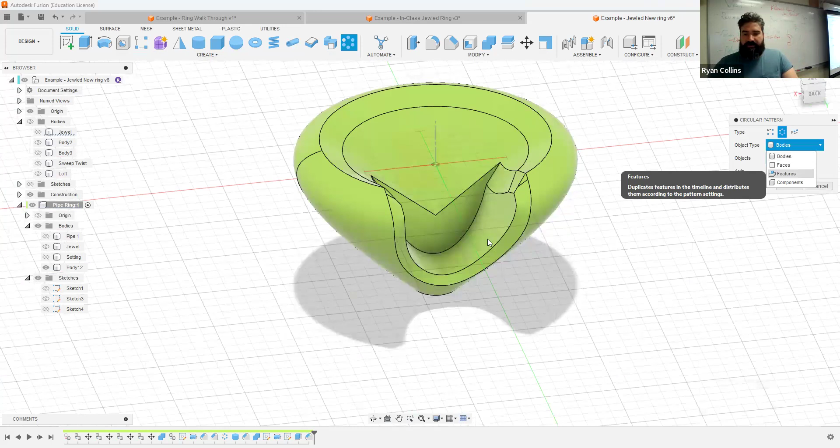I need features. I need both the inside and outside. There we go. Axis, same. Again, drop it down to 3. Hit OK. So now I just got these kind of weird, but much too large tines. But that does work. Now I can unhide the jewel. Yeah, that's way too big. I should have made that fit point spline a little bit closer in. But you get where I'm going with this.

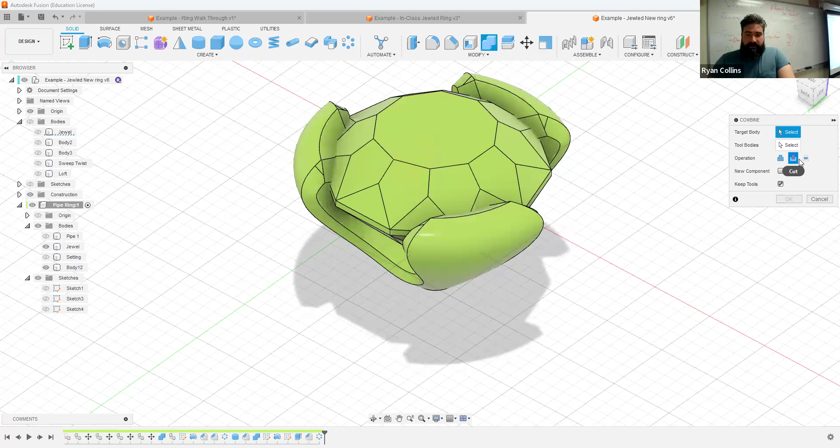Now I can use the combine and cut tool. Select the fitting. Use the jewel as the tool body. Make sure to keep tools. I do not want that jewel to delete. Hit OK. And now when I hide the jewel, it form fits.

For this project, if you're printing this, that's really irrelevant. But if you were trying to make this in an actual jewelry setting or whatever, that is a really handy way, and this goes for everything really. If you're planning on making two things where one has to exactly fit inside the other, that's how you do it. Use the actual object as a cutting tool and chop into the center.

All right. Simple setting. All right. I don't like that one anyway, so whatever. Last step would be, well, second to last. Let's save that. Simple setting. Join them together. Obviously, you can scale this stuff up and down if you need to. Resizing. Obviously, this ring looks way big for that jewel. Oh, right, because I sized it as a bracelet. Yeah, the scales aren't quite right.

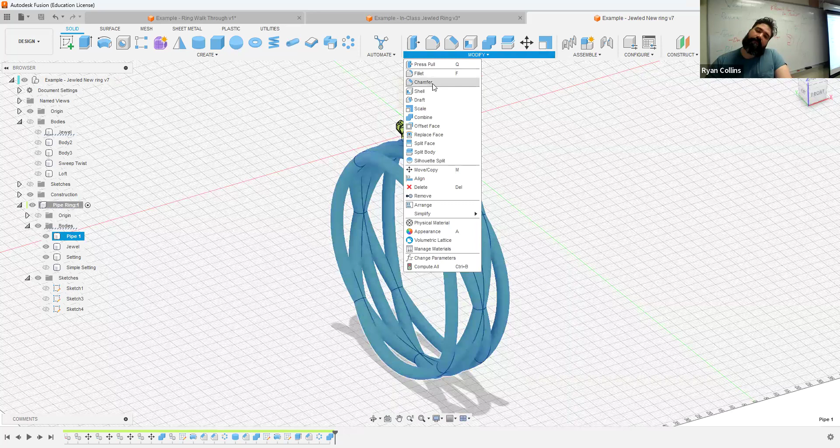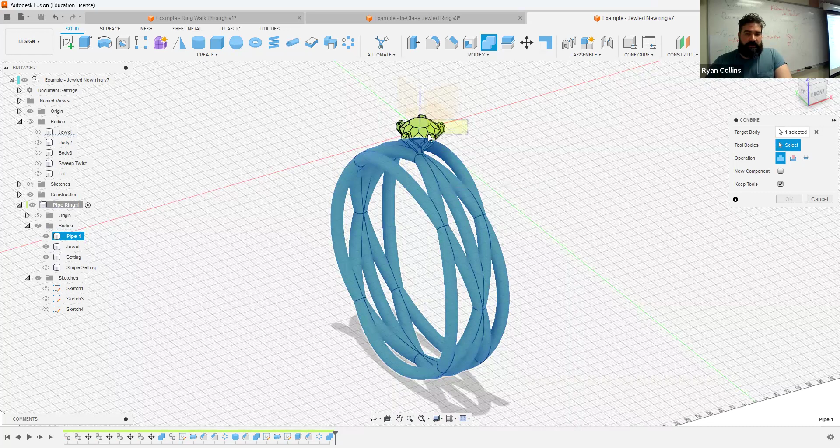But if you decided that you did need to rearrange that, you could always either scale down the final product using the scale tool, or just resize the original sketch if you needed it actually exacting. Last step would just be join the stuff together. Combine, join, make sure it's actually join. I want the body, the ring and/or bracelet, and the setting to join, or you could join all three of them together.

I'm just going to kick these out as a new component. Select that and hit OK. And the reason I did that is it kept all of my original bits as separate things, but you just activate the whole project, and I unhide that. Now it's one solid joined element.

So next class, we'll go over making some more complex bits like adding the additional features, if you have used either sweep or loft, so you actually have a surface to do that to. But this is what we're going with. Make the jewel, make some kind of a setting. You can always play with different versions. It's up to you. Play around with different ways of making either the settings or the ring, bracelet, whatever. Totally up to you, but know that there's quite a lot of options. Main things are a jewel, a setting of your design, and a wearable thing.

I'll show you how to print these later. All right, play with it. Enjoy.